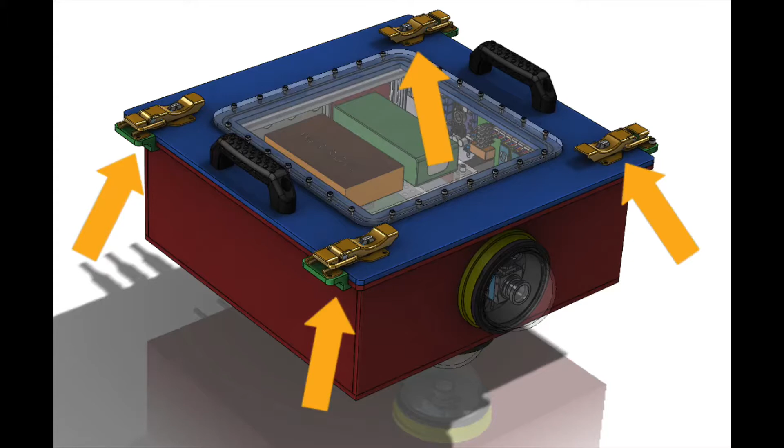Lantern's hull is a box-shaped, waterproof electronics enclosure made of welded aluminum 6061 sheets. Key features of the hull are its gasket-sealed, removable lid, its forward and downward-facing camera enclosures, its connector bulkhead that interfaces the internal electronics with the external electronics exposed to the water, and its internal shelving unit that's connectorized and can be entirely removed from the hull for ease of maintenance. Manufacturability and maintenance were the two primary drivers in Lantern's hull design.

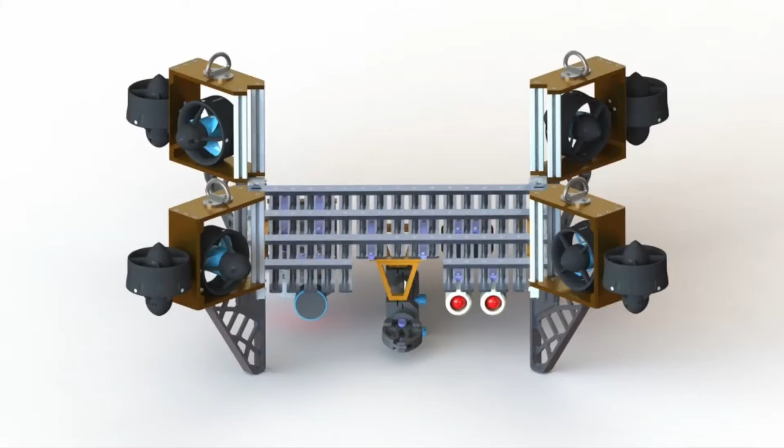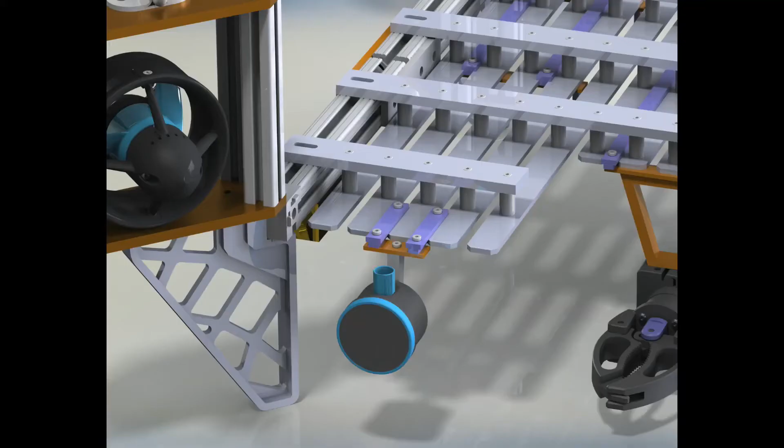This year, the team opted for a modular design for both the frame and hull. The goal was to greatly improve the accessibility of all components on the sub in order to minimize the time spent on maintenance. The frame must be able to provide mounting surfaces for sensors, thrusters, ballast, and various mechanical devices. This is achieved by standardizing how all components will be mounted onto the sub. The frame uses a custom T-slotted fixed rail design for the components to be quickly slotted in, then simply locked into place by a single bolt or set screw.

Another improvement over previous generations of subs built at Cal State LA is optimal component placement. In the past, to get access to a specific component required the removal of other components in the way, which can take up to a whole day to disassemble and put those components back into place. The new system aims to provide better mounting solutions by placing the components that are likely to be swapped out at more accessible surfaces, and each mounting surface will be independent of one another, eliminating the need to remove other components in order to get access to another one.

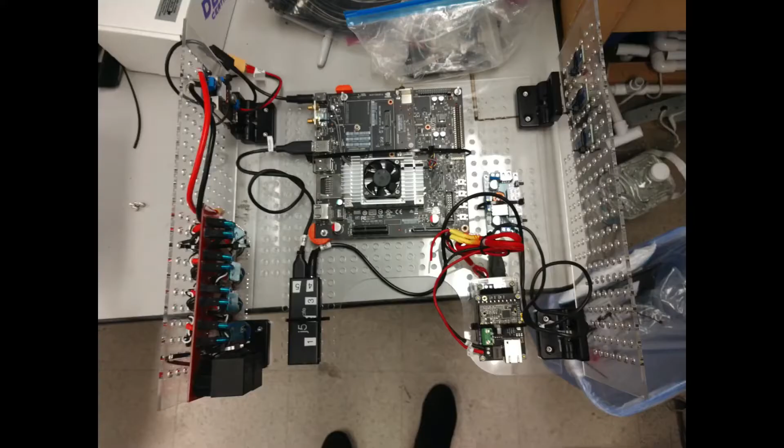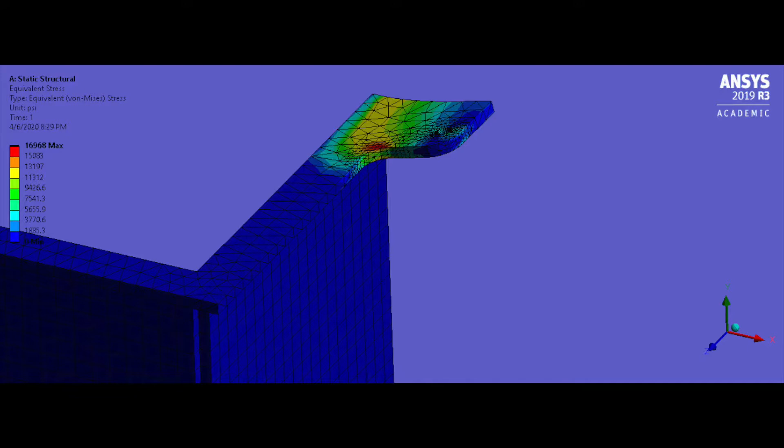Prior to Cal State LA's transition to online classes and remote work in response to the COVID-19 pandemic, the mechanical team had made solid progress in manufacturing Lantern's mechanical systems. 90% of our machining and water jetting had been completed, and we were preparing for welding, assembly, and integration. Since the transition to remote work, the mechanical team has conducted static and fatigue analysis to ensure our designs were robust enough to withstand expected loading conditions with a reasonable factor of safety and that they would last for years to come. We conducted stress analysis on our latch points, weld joints, vehicle legs, and our lifting lugs.

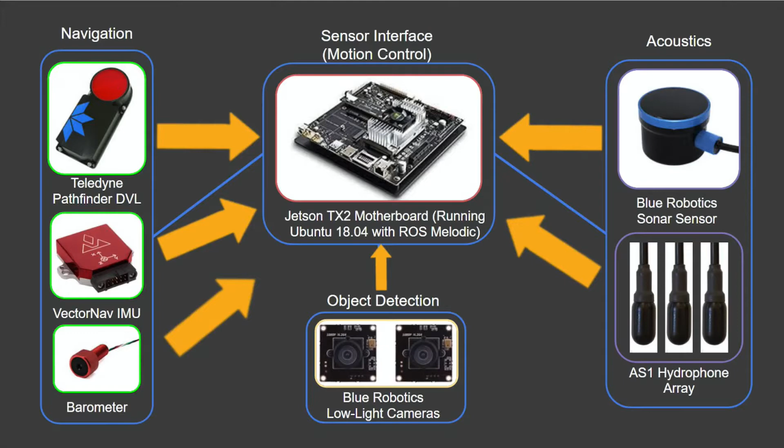Lantern's electrical system consists of a motherboard, sensors, microcontrollers, and a power distribution board. The sensors include a barometer, an IMU, a DVL, a sonar module, cameras, and hydrophones. Each sensor provides the motherboard with information about the vehicle's environment, which can be used to interact with its surroundings accordingly. Some of these sensors require microcontrollers for data processing before the data is sent to the motherboard to avoid using resources that are reserved for image processing and decision making.

The motherboard contains the state machine that outputs movement commands for the motors. This year, the electrical engineers on the senior design team focused on the development of a smaller power distribution board, an active tracking system using the Blue Robotics Ping sonar sensor, and the development of an acoustic localization system using hydrophones.

Hello, my name is Viraj Bhakta, and I am part of the computer science team for Cal State LA RoboSub. The computer science team is divided into two sections: the computer vision team and the mission planning team.

The computer vision team's goal is to use images from the camera feed for object detection and image recognition. The technologies they used were YOLO (You Only Look Once), Darknet, and OpenCV.

Although we were not able to implement our software and integrate it into the submarine using live data, we were able to use test data and randomized data to test our software. The state machine ran the scan gate state 3 times and the find gate state 2 times before it was able to select its role as the G-man and pass through the gate.

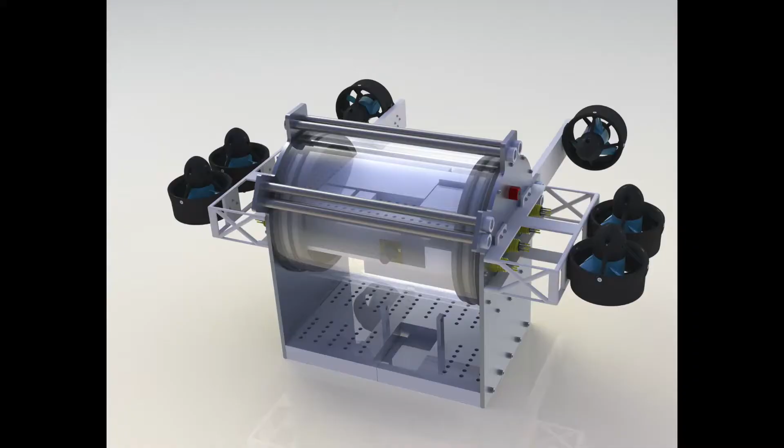The frame and hull team has had two primary design goals in mind from the beginning: we wanted to make it easy to access the internal components of the sub, and we wanted to make it as hydrodynamic as possible. To achieve this, the internal components can be accessed by just unthreading the 6 nuts you can see around the top of the sub.

Once you do that, the entire side can actually come off. You'll see some screws down at the bottom, but those aren't threaded all the way through. We filed off the threads at the end so that they act more as pins to hold the bottom plate in place.

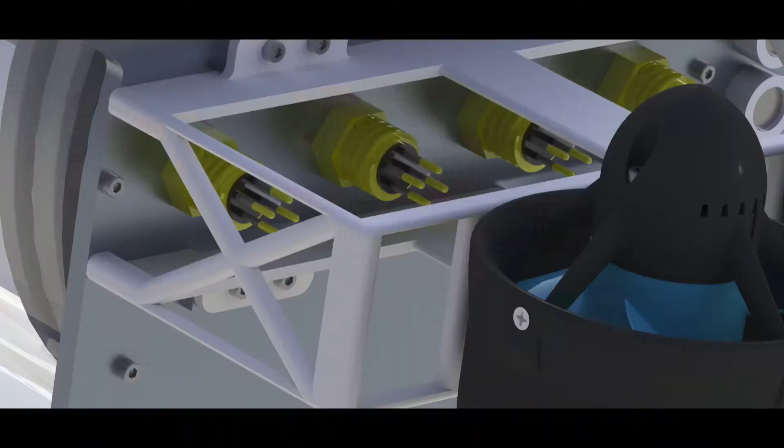To improve the hydrodynamics, we made it so that the rounded section of the tube was in the direction of motion, as well as rounding off all the edges of the other parts, such as the thruster mount that you can see here.

For the sections we couldn't do that with, such as the edge of the aluminum side plates themselves, we've instead minimized the surface area that would be perpendicular to the direction of motion.

This year, our team tried something new by using a Raspberry Pi as our motherboard with no other microcontrollers. The Pi was responsible for sensor data acquisition, running the controls code, computer vision, and decision making. In the past, the team has used Arduino boards for sensor interfacing, but our success with this method has opened our eyes to other possibilities.

The controls for Donphan were a straightforward implementation of PID systems for each axis of movement, responding to commands sent from the state machine. As for mission planning, Donphan relies on a simple state machine loop that searches for an objective, approaches the objective, executes the task, then disengages and records the completed task.

Since we lack hydrophones, we are dependent on what we can see from computer vision, leading us to focus on completing tasks with a heavy visual element, such as a gate task.

Each state related to the task is responsible for obtaining relevant data from the sensor modules, as well as controlling the submarine. Each approach and execution state is unique to the task, allowing the programming and testing of specific tasks without needing the entire state machine running.

It also allows for setting a time limit on a task, making the submarine move on if the task is taking too much time. This modularity of the system will allow for greater reuse of code, as well as faster modifications without disturbing the function of other task states.

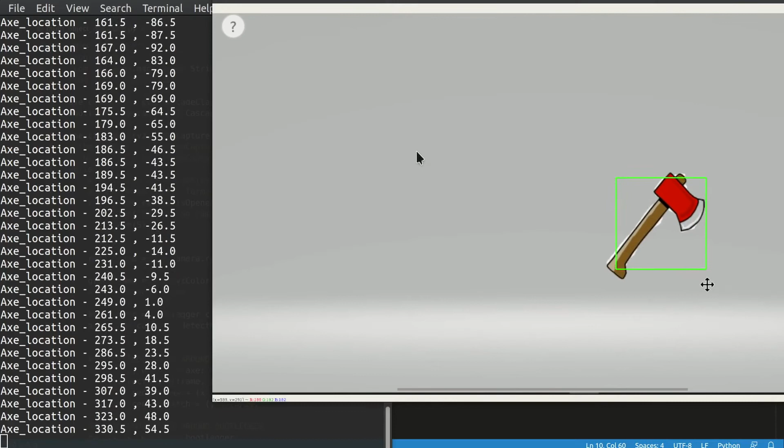To test that our program worked, we inputted video into our program and had it put out two things: what it was looking at, and where it was looking relative to the camera.

Our strategy this year was to develop two different vehicles to complete different tasks during the competition. Lantern would be equipped with hydrophones and attempt the tasks marked by acoustic pingers, while Donphan would get style points from the gate and attempt the buoy tasks using its less sophisticated hardware.

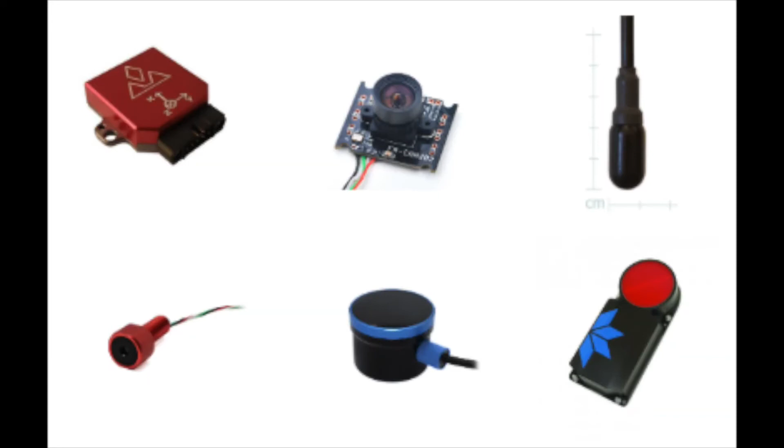This strategy was devised in consideration of our limited budget and team organization. We reused several expensive sensors from previous years on Lantern to provide it with more capabilities, while Donphan was created with less expensive hardware and was intended to help our lower classmen learn about the project for future years.

Our team also explored the possibility of inter-vehicle communication using computer vision, but we did not have the chance to test or incorporate this into our competition strategy.

While this year's team worked hard on programming and simulations outside of the lab, our members who will stay on the team next year have been working hard to organize workshops, presentations, and other ways of allowing members to participate in the RoboSub project remotely. Our advisors are even working on a full robotics course for students to take that will prepare them for RoboSub once students are allowed back in the lab.

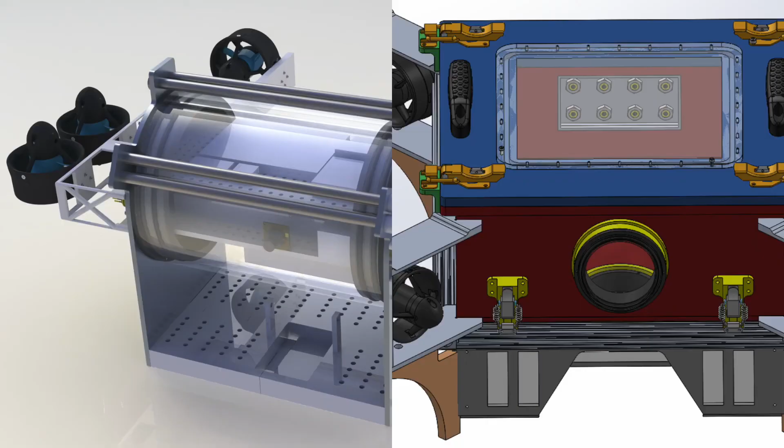While we're sad our subs were left unfinished in the lab, we hope you'll get to see them swim in San Diego in the summer of 2021. Until next year.